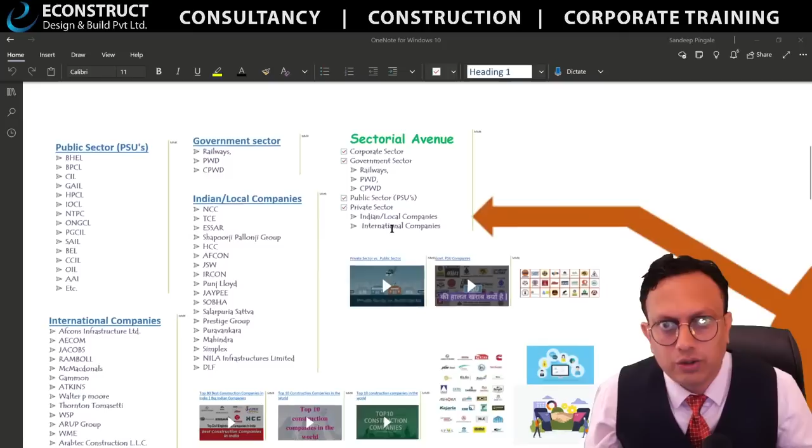Alright, so let's get started. First event that we have conducted was the avenues and all. So what are the different avenues? Sectorial avenues are there - public sector, PSU - you can see BHEL, ONGC, NTPC, all the public sector companies, government sectors are there.

Then you can see the local Indian companies. You can pause the videos and take screenshots so that you can think about what kind of opportunities are there. International companies are also there - Envisage, Afcons, AECOM, Jacobs, Ramboll - that was the company where I worked for a very long time, 5 to 6 years. So many international companies are recruiting civil structural engineers, project managers and all.

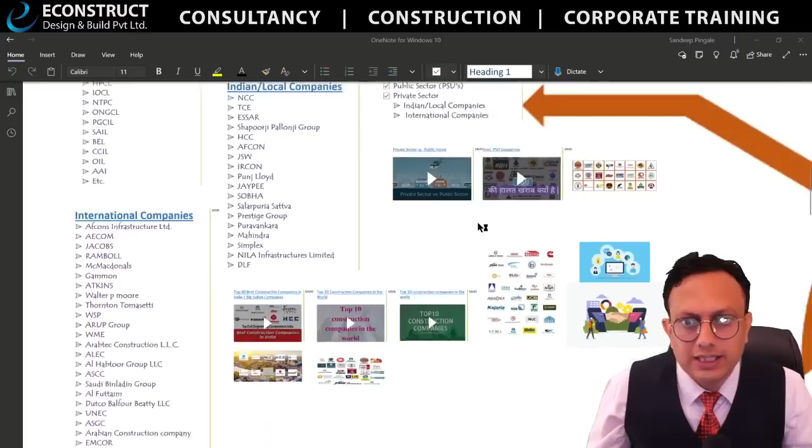So sectorial based avenues - corporate sector, government sector, private sector, public sector, local, international companies, and all are there. So if you see, many sectors are involved.

Let's say, for example, if you go to the building sector - residential, commercial, industrial, infrastructure, railway - all this comes under the public sector. Currently so many people will say, sir, railway, how can that be a public sector? You might be knowing there is a public IPO that has come, so obviously there is some kind of areas in the railways, and the second IPO is also coming, which is basically for finance.

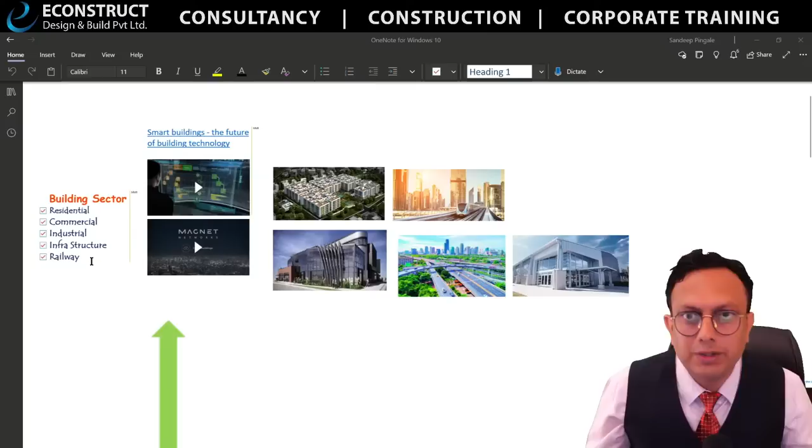So obviously it has become a public sector. So building sector also you are having, because in railways there are so many buildings, railway quarters and so many things. Obviously residential, commercial, all this will come under the building sector. Another one is subject to whatever the subject that you are liking.

Based on that, there are so many avenues which are related to geotechnical engineering. You can do geotechnical consultation, like giving the SBC, or maybe for tunneling it is required, for the earthen dam it is required. Many places geotechnical engineers are required.

Surveying is like, we are using the current surveys of the Britishers, to be very honest. We do not have the real-time survey maps. Even with the GPS and all, you know where you are standing on this entire planet, but you don't know where is your plot line. That is the irony of this country. So we definitely require a lot of awareness in surveying.

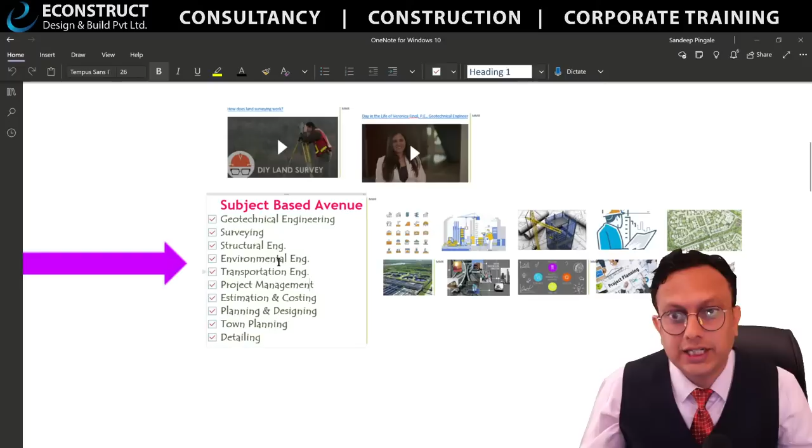When I was in Dubai, the GPS coordinate was there. I am dreaming, at least in my life, that if I'm purchasing a plot, there would be the 4 GPS coordinates, that this is the plot line, so somebody is not encroaching it, and somebody is not putting somebody else's name or reservations - many problems are there. So a lot of revolution, energy creation, innovation and digitalization is required in the surveying branch. The mapping, surveying, through GPS, with ArcGIS and many other softwares, I'm sure this particular branch can be revived over the period of time.

Structural engineering is also one of the branches where you can become a structural engineer, working with some other companies and all. Also environmental engineer, project transportation engineer - yes, there are pros and cons. Let's say, for example, you are a transportation engineer - you always need to be aligned with the contractor or with the government. You cannot just say that I want to have a road here.

It's a public property, so unless and until it's a private inside property road, you will not be able to get a chance in transportation engineering. But I'm not saying there is no scope.

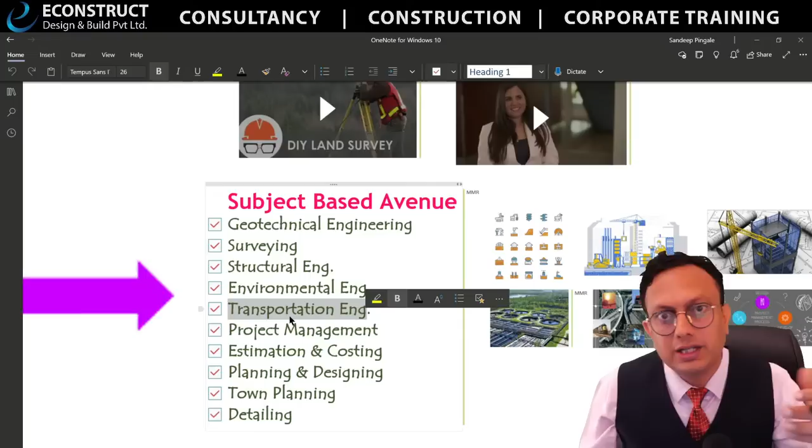The only thing is, you can do it with, let's say for example, project management in that particular area, BIM technology. In that you can take up certain government contracts and deal with project management, PERT chart, CPM chart, and actually economize cutting volume, cutting and filling quantities. So those kinds of things are there in transportation.

Project management is a little versatile branch. If you ask me, as a project manager, you can work with every single discipline in this particular area. Why? Because it's a very versatile and flexible kind of branch.

Project management is getting into everything. Even if you go to the IPL, for example, it's a project, so you need some kind of project management, how to make a launch. If there is a satellite, you need project management. If you are doing certain software development, there is project management. So project management is very vast.

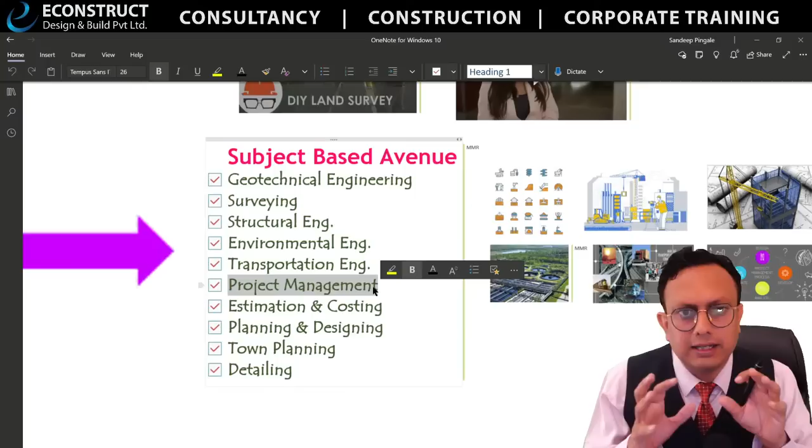It's not only the civil engineers' domain. There are so many domains. So we have seen so many estimation, costing, planning, designing and all. So we have seen so many avenues like this.

Okay, industry based avenues are there. Real estate industry, as I told you initially, it's not only buying and selling, you need to maintain the properties. So there is an audit, structural audit, and many other things. A lot of real estate companies are there where unfortunately civil engineers are not getting recruited.

And if you really want to, there is a lot of work we need to do. If you go to UK, for example, you will see buildings which are 350 years old, just like new. But in India, what is happening? Cement is cement, steel is steel, everything is the same, but still after 25-30 years, you'll see that, oh, this is an old building. What the heck is really happening?

It's a national resource loss that is happening. So we really need to revamp this industry and make sure that, because later on people just see what is your rate, how many rupees per square foot, that's the rate as a contractor you are quoting. So definitely there is a lot of revamping, the changes, transformation, not only change, transformation is required.

And believe me, crores of rupees. The first sector in India is the real estate sector, the construction sector. Somebody will say, as per statistics, agriculture is the first sector, but my father is a farmer, I still know that agriculture is a completely disorganized sector. The proper industrialization of agriculture has not happened, unfortunately.

So I wanted to tell you that proper industrialization of the construction industry has happened. Why has it not happened in the agriculture industry? There are so many problems related to the rain, related to the land, because it's food, so there is always sympathy involved. You might be knowing that currently in Delhi there are so many things happening, a lot of fighting is happening. So agriculture is not the first industry when it comes to industrialization.

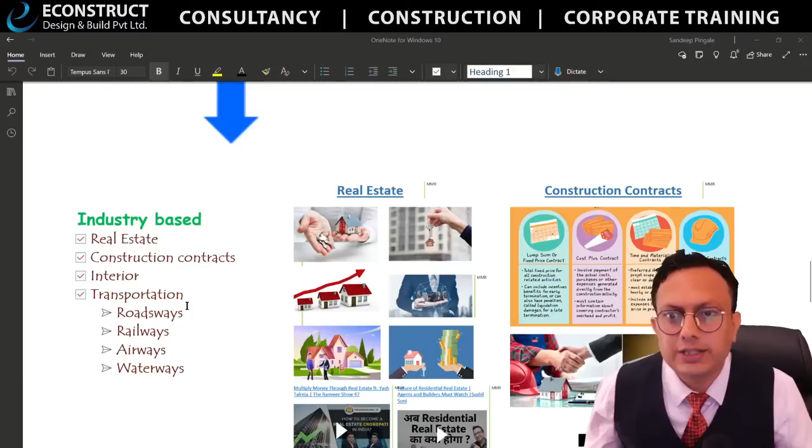The first industry in India when it comes to quantum of money is only the construction industry, the real estate industry, where all the money is flowing. So real estate industry, construction industry, interior, transportation, in all the ways, industry based avenues are there, skill based avenues are there.

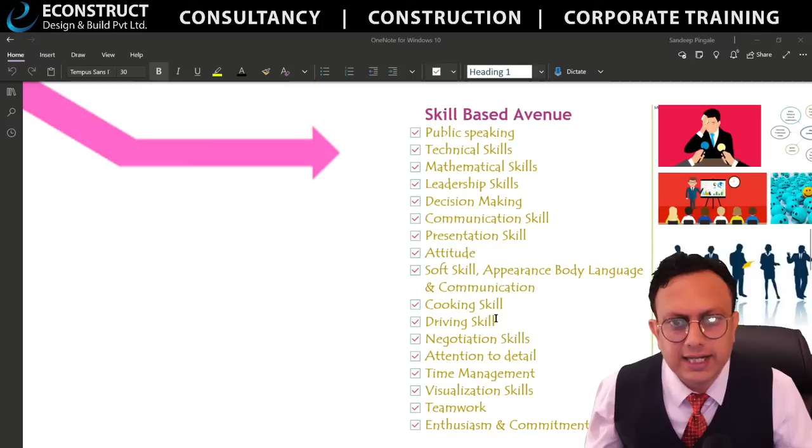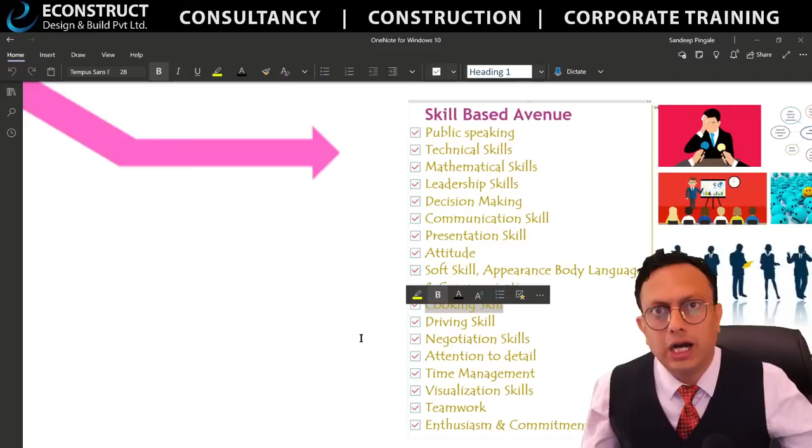Skill based avenues include public speaking, technical skills, mathematical skills, leadership. You can take a snapshot of this, even cooking skills. Let's say, for example, if you've got enrolled in a company called L&T, and there is a highway going on in the middle of the jungle, there is no cooking facility. So in that case, what do you do? So it's very important for us to understand that these kinds of skills would definitely help you out.

Okay, so it's a skill ultimately. So what kind of skills do you require? Because so many people say khana banana aata hai, can you do the driving - these kind of skills are definitely not the only skills through which your recruitment happens, but these skills will make you eligible to go to higher levels of roles and responsibilities.

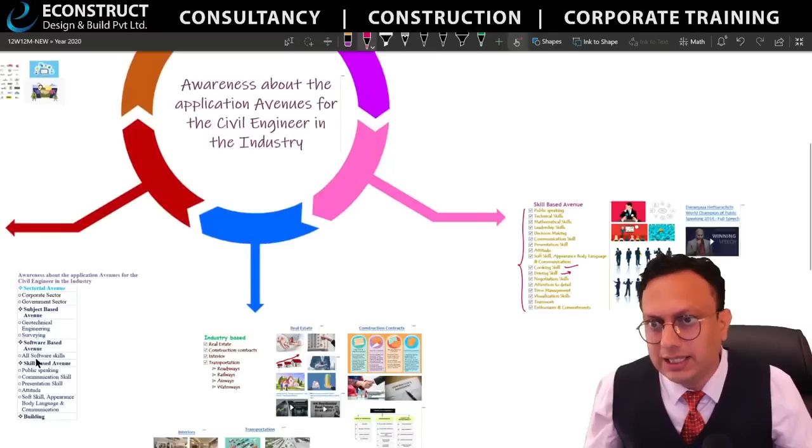So skill based avenues are also there. When you go to the industry based avenue, we have seen that sectorial based avenues are also there, where different sectors exist - software based avenues, subject based avenues. Software based means what kind of softwares are there.

Let's go to the software based avenue. So many people, let's say for example, I know the ETABS software, and I have somebody else who got the requirement in ETABS, so that's why the recruitment is happening. Somebody knows Tekla, somebody knows the Midas software, somebody knows the SAP 2000 software. So these kind of softwares - somebody knows Revit software.

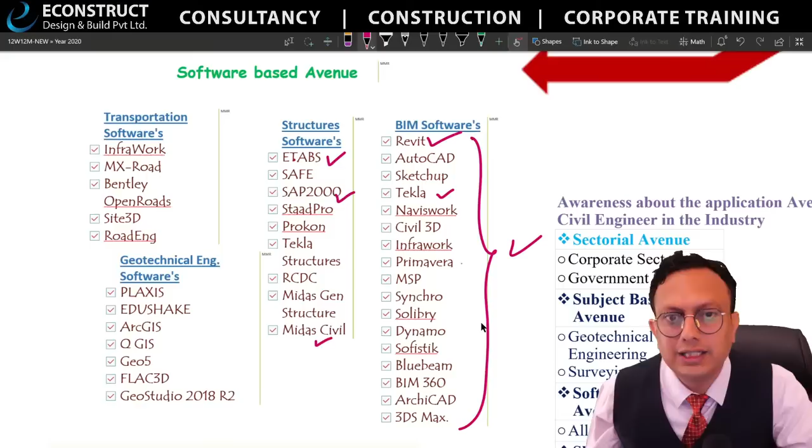So depending upon the requirement of the software, if you want to work on the BIM system, these are the softwares that you should know. I'm not saying all the softwares, but at least more than 50-60% of the softwares you must know. If you want to become a structural engineer, at least more than 50-60% softwares given in this particular list, you should be knowing.

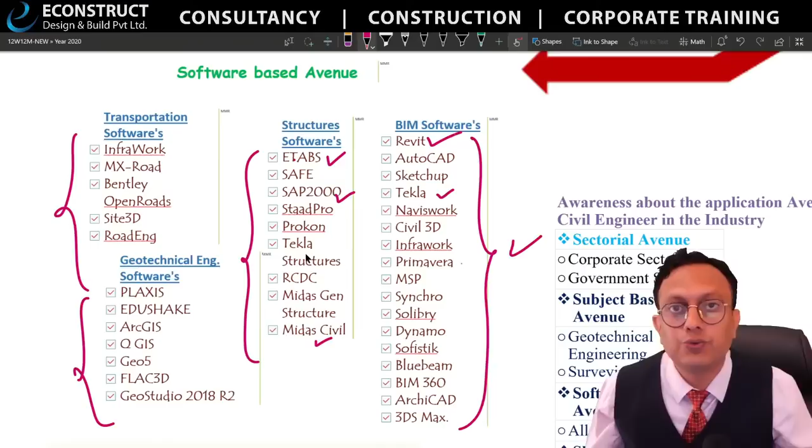If you want to go for infrastructure, or maybe geotechnical engineering, these particular software avenues will improve your career to the maximum extent. So these are the software based avenues in the current era of the 21st century, where the IT sector is there. In the IT sector, software is one of the key things that you should understand.

Why? Because you guys are not having the experience. Let's come to the reality - if you come out of college, how will you actually get the experience? So the only thing you will be having is expertise towards the software. So it will definitely help you.

Many people say that if you only learn softwares, will you get proper jobs in MNC companies and all? It will never happen. Why? Because along with the softwares, you require very, very fundamental things. What are the fundamental things?

First thing is actually software. Along with the software, you require code-based knowledge. The third thing which you require is engineering principles - structural engineering principles, project management principles, surveying, and other engineering principles you require. And the fourth thing is actually live projects.

Okay, expertise. So these four things are required. Only software if you know, only gearbox if you know, actually you cannot drive a car.

Let's come to the reality. Civil engineering is the industry where you need to understand that this is experiential knowledge. So software based requirement, code based requirement, engineering based requirement, and live project expertise requirement are all there.

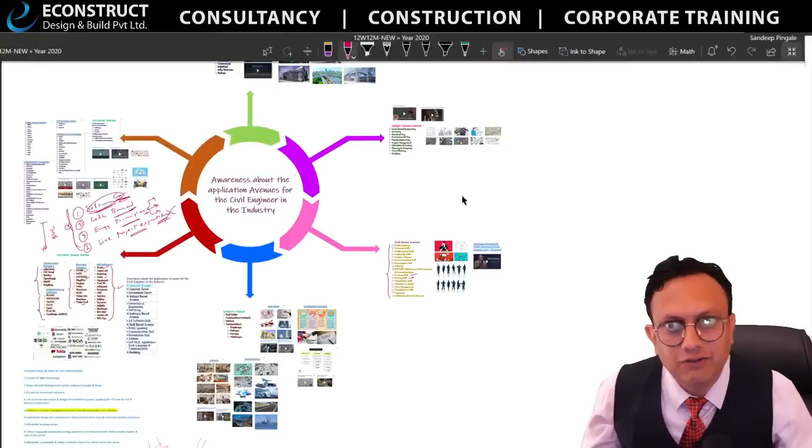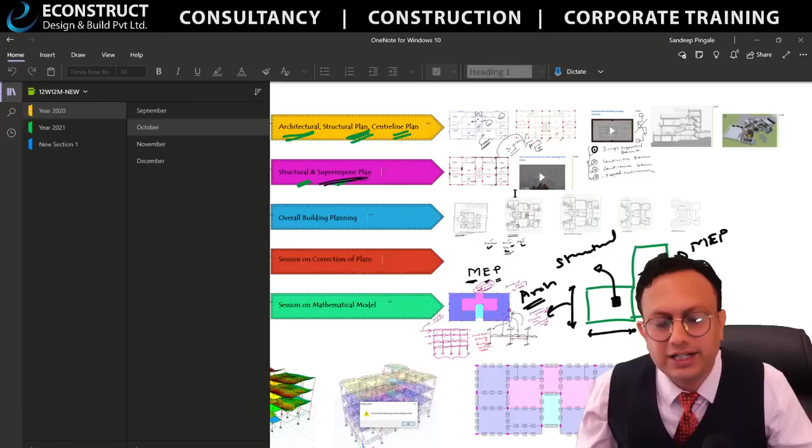This is what we explained in the very first session, but if you want to look into it in detail, I have explained it because a lot of sessions I have taken. In September we started, then in October we studied the centerline plan, superimposed plan, and other things. You will see those details in those videos. If you are not getting the videos, please ask on the WhatsApp number given on our website or in the description box below, and you'll get the links.

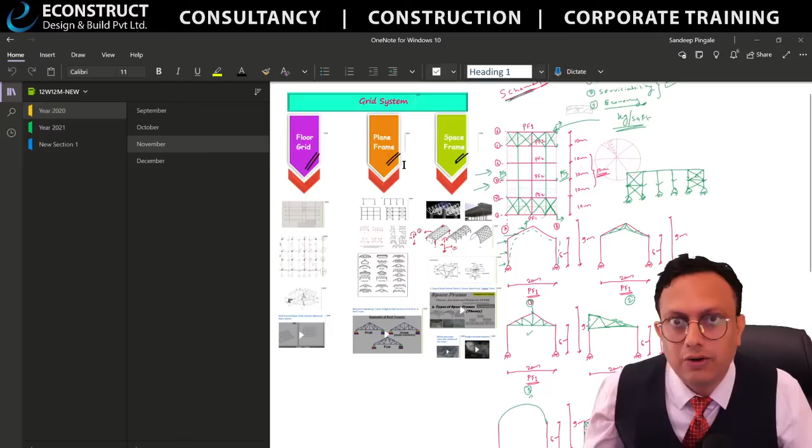In the November month, we have seen many things related to the grid system, like portal frame analysis, space frame analysis, and all those things we studied during grid systems. In December, during the last month, we saw different types of analysis, static analysis, dynamic analysis, the uses and requirements. If you have not gone through these videos, please subscribe to our channel and you can go to those videos, or ask the WhatsApp number given below. We'll be giving access, because certain videos we are not airing continuously, due to certain reasons, since this is basically a 12W 12M session.

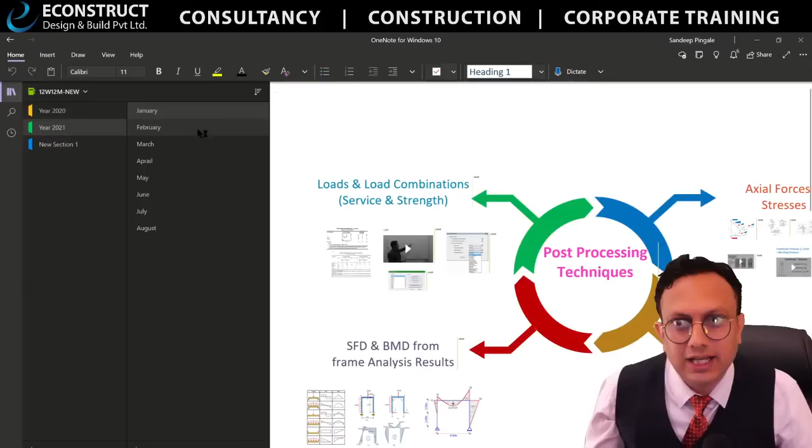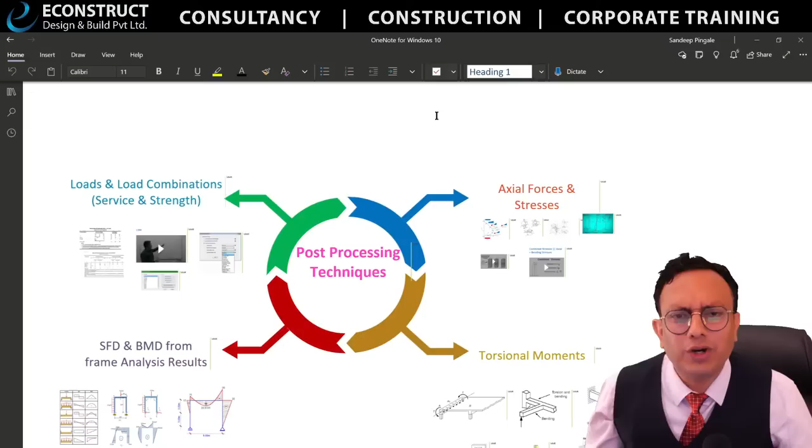In this year, January, February, all these sessions would be there, so stay tuned, you will get a lot of information. Let's talk about post-processing techniques, what this is, and what all the different techniques are there. After you do the analysis, say static or dynamic analysis, what is basically the post-processing technique? Let's look into that. For example, say you got certain problems with your body, you got some headache or maybe fever or something like that. So what do you do? You go to the hospital or maybe a clinic or a doctor.

The doctor will take your pulse, check the BP, check the body temperature, and all. He will try to identify the symptoms. The body is giving certain signals, right? So that is one type of analysis, believe me.

Another type of analysis - if something seems off, like 'oh my god, this might be corona, this might be something else,' he will do a blood test. Further analysis - blood test, hemoglobin, thyroid profile and all. So a variety of different analyses he will conduct, so that he will have a lot of data in front of him to make a proper diagnosis of what's really happening and why the body is behaving like this. Understood?

So this is basically medical analysis. When it comes to civil engineering or structural engineering analysis, the same types of analysis are there, like static analysis, dynamic analysis, many different types. Furthermore, if there are deflection issues, you will go to creep analysis, long-term performance analysis. So many different types of analysis we have seen during the last session.

Imagine that some of you might not know what creep analysis is. Imagine you are a doctor and you don't know hemoglobin - 'Oops, what is this? Hemoglobin? Wait, let me Google it. How to check the hemoglobin?' If that kind of doctor you are going to, what will be the situation? You will change the doctor - he doesn't know hemoglobin also, the levels of that.

Understood? Similarly, what is creep analysis - you don't know, you need to understand that. In college, actually, only one type of analysis gets conducted - that is linear static analysis. And then all other parameters would be there, like deflections, bending moment, shear force and all.

Actually, I'm not giving any kind of justice to that, because within just 4 years it is very tightly packed as a civil engineering course. It's not that they can just focus only on the structural branch - they need to work on other branches also, they need to complete their syllabus also. So they cannot combine all the different types.

So what happens is the person who wanted to do structural engineering or something like that loses focus - that's what is happening. Understood? So what actually has to be changed in the syllabus is a separate question. We cannot change the universities, college people, or the syllabus - it's impossible, let's face the reality. So you need to focus on certain other parameters than the colleges, so that you can get practical touch. That's what we have started.

So let's see the post-processing techniques and how to do the analysis. If you go here, you will see there are different types of analysis - dead load, live load, and different cases. You can add different cases too: linear static, non-linear static, non-linear construction stage analysis, response spectrum analysis, time history analysis, buckling analysis, hyperstatic analysis. So many different types of analysis are there. It's not like just knowing this - in one project you might require more than 60-70% of the analysis types.

There's a lot to construction stage analysis - it's a very big topic. If you see construction stage analysis, you can add different stages. You will have tree diagrams showing different outputs, and you can expand the stages if you want. For example, let me show you one area - the auto sequence stages. If I add this, I'll go to P-delta and auto sequential stage construction sequence analysis. Here you can see a variety of construction stages - what are the different stages, and you can expand them to see what's happening in each particular stage.

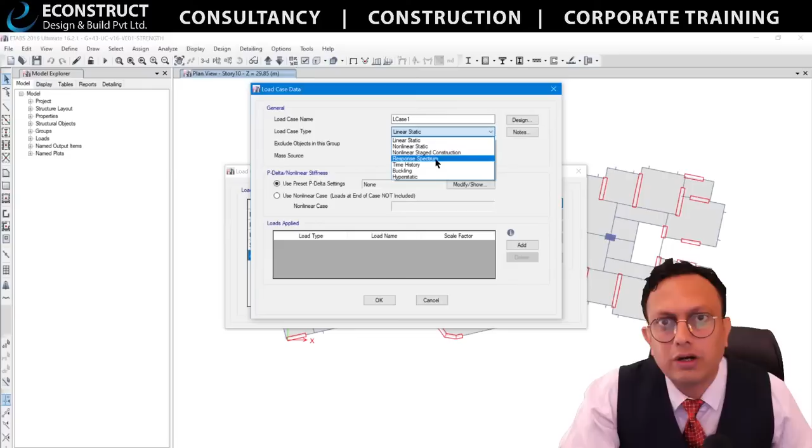Similarly in structural engineering, depending upon the type of project, you need to give the particular analysis. A good doctor, based on the patient, will diagnose first what exactly has happened, understand whether this is the cause, and then apply that kind of medicine or injection. Similarly in structural engineering, depending upon the requirement - whether it's related to static analysis, dynamic analysis and so on - he will apply that kind of analysis, perform it, get the results, and do the scrutiny.

So after the analysis, what are all the different things to check? Let's see that. After the analysis gets over, you would definitely require to check many things. First of all, what are the loads and load combinations? Let's see what loads and load combinations are there when it comes to the Indian code. Other international codes have other things. We'll see the Indian codes first, and then we'll see the other international codes a little bit too.

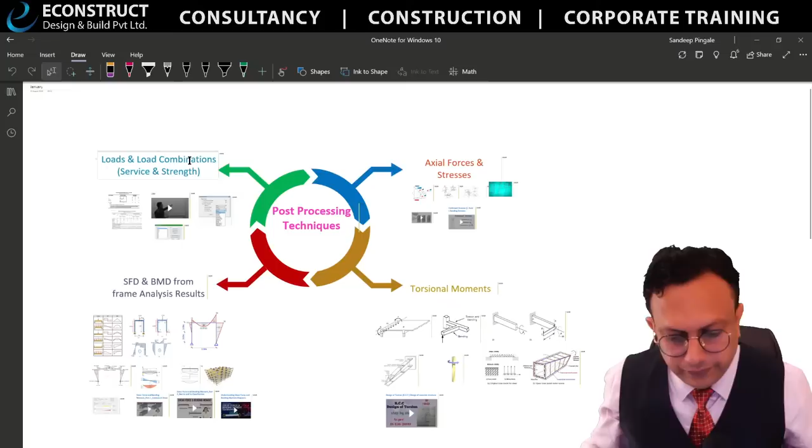So let's talk about load combinations. These are very important. The first fundamental combination is 1.5 times dead load plus 1.5 times live load. We call it DL plus LL.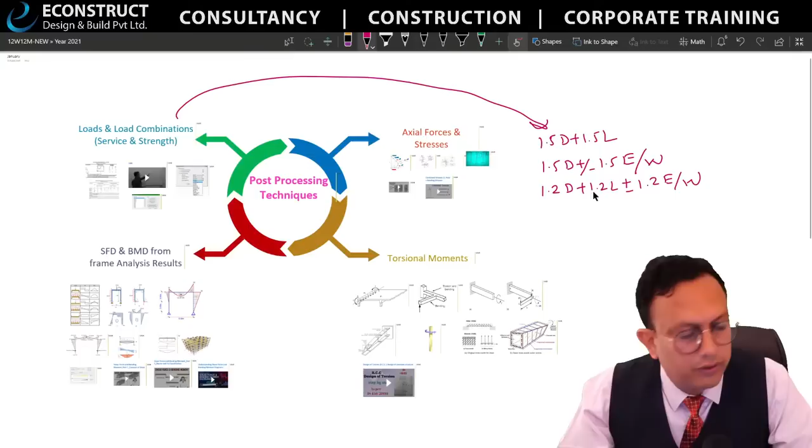The second combination is 1.5 times dead load plus or minus 1.5 times earthquake load or wind load. Then 1.2 times dead load plus 1.2 times live load plus or minus 1.2 times earthquake load or wind load. Another set is 0.9 times dead load plus or minus 1.5 times earthquake load or wind load.

Generally these are the combinations, but these aren't the only ones. For earthquake load, you will have earthquake in X, earthquake in Y. Sometimes if there are cantilevers, there will be earthquake in Z also. This would be static analysis. Sometimes earthquake will be in dynamic form, so spectral X and spectral Y.

For wind load, you have wind X and wind Y, which is the static analysis. Sometimes you will have wind gust calculations, so WDX which is wind dynamic X. Sometimes there is wind tunnel analysis, wind tunnel X and wind tunnel Y, applied plus and minus. There are a lot of things combined.

Which combination will you use? You might think, this is a big one, so let's use this. No, you need to use the worst load combination.

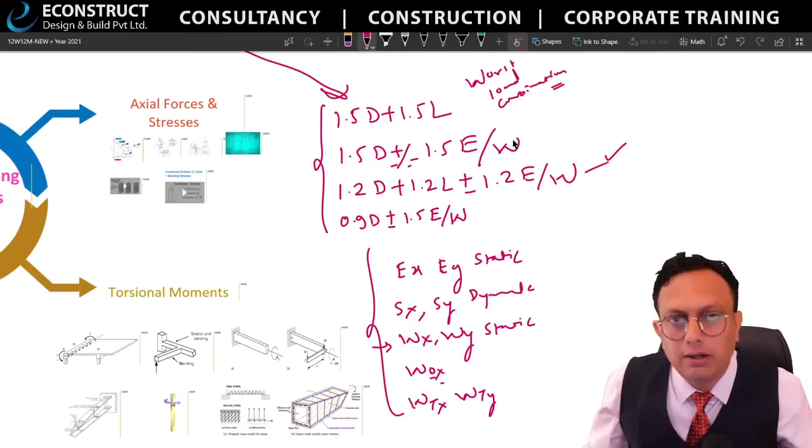So many technical things you should understand, and how to apply them you need to go through. So let's see, in a particular project, how you are going to do the analysis.

I'll take a simple project instead of a complicated one. This is a 43-story building, I'll show you after running the analysis. Let's go to a simple project, select the Indian code, IS code, and choose a flat slab with perimeter beam. So you'll have beams and slabs also. I'll give certain loads here.

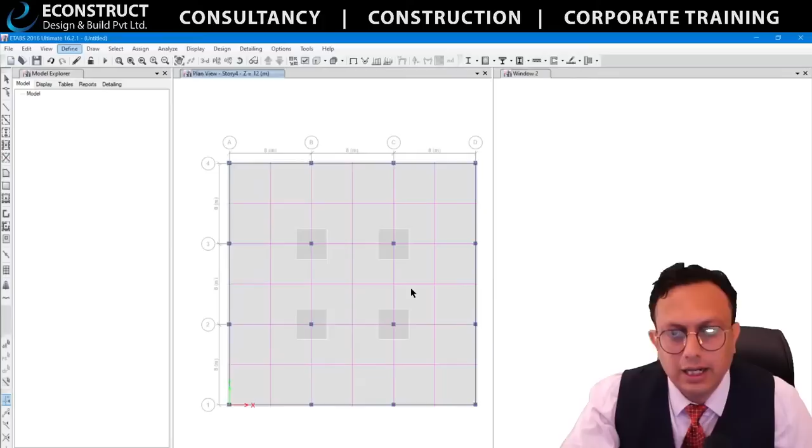You will run the analysis for this, but for that I will add the earthquake loads also. Once you do that, it will generate the model. Now I will apply certain earthquake loads also.

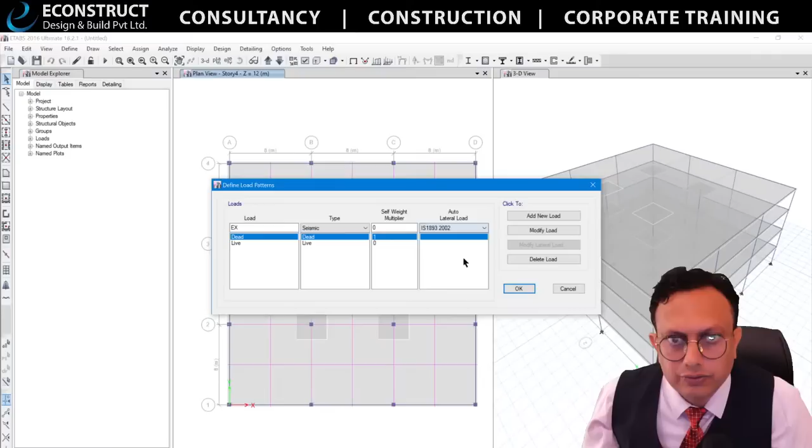Let's go to the load cases, for example earthquake in X direction. I'll give that in the X direction. I'll keep this same for now, but you need to apply it properly based on code requirements. I'll apply it in the Y direction also.

Then I'll apply the wind load, wind X. This goes to the wind load section, addition of wind load here, and wind in Y direction also I'll be adding.

From here you will see, for example, 0 degrees wind X, and here 90 degrees. Why? Because based on the degrees, the angle of application of the load will change. So Wx will be in the X direction, you can see the X here. Based on that it will be considered in the X direction, and you can see the Y direction here, applied to the Y direction.

I'll show you that in the arrow. The X direction, whenever applied, will act on the building in this direction because this is X, and it will be applied in the Y direction because this one is Y. So earthquake load and wind loads are given here, in static format. Now we'll see the dynamic format also.

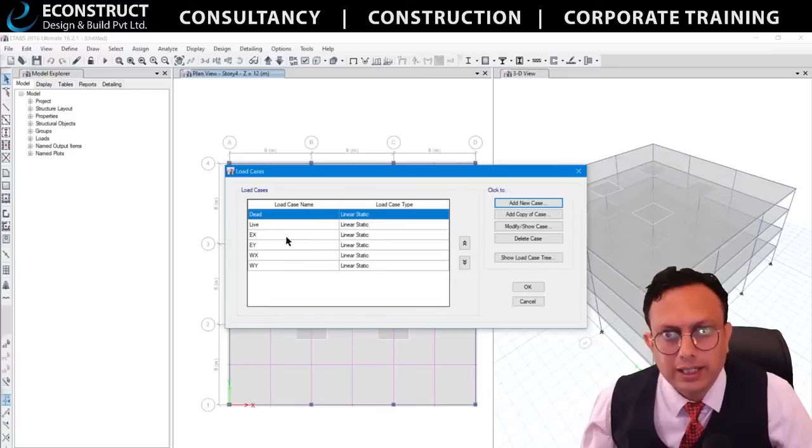Okay, so what else we can do? We can go here and add certain dynamic load cases if you want. From here, this is static, so similarly you can go to the dynamic analysis, let's say for example response spectrum and all. So that cases also you can add, but currently we will consider only these particular static forces.

So let's get started. I'll just run the analysis with a certain file name. I'll just give any particular file name and I'll start.

Before that, I'll just show you the live project also. This is the construction sequence analysis that's going on for the live project. This is a 43-story building in which you will study the sequence analysis also, but here you will take it as a prototype, the smaller version, so that you will understand the concepts basically.

All right, so the analysis is happening. This is the flat slab. You can see that it's a very regular grid, easy to understand and all.

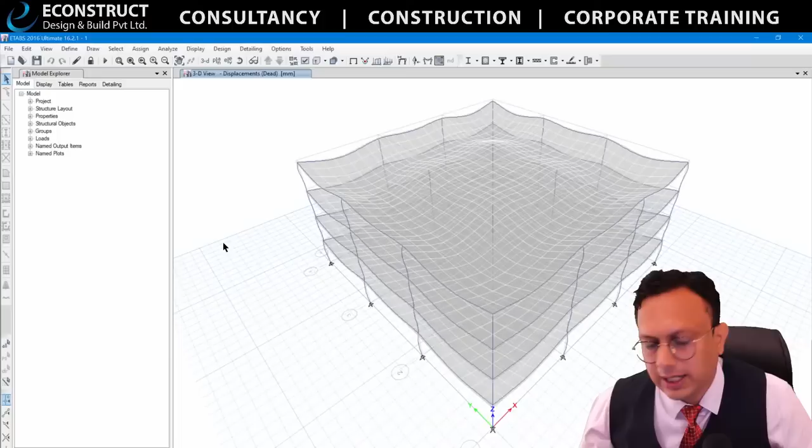The first thing that you will study is the deflection shape. At a particular glance, you can easily see that the X, Y, Z displacements are happening. It means whenever you will see the picture, you will see X, Y, Z, Rx, Ry, Rz. So all the figures will be there over there.

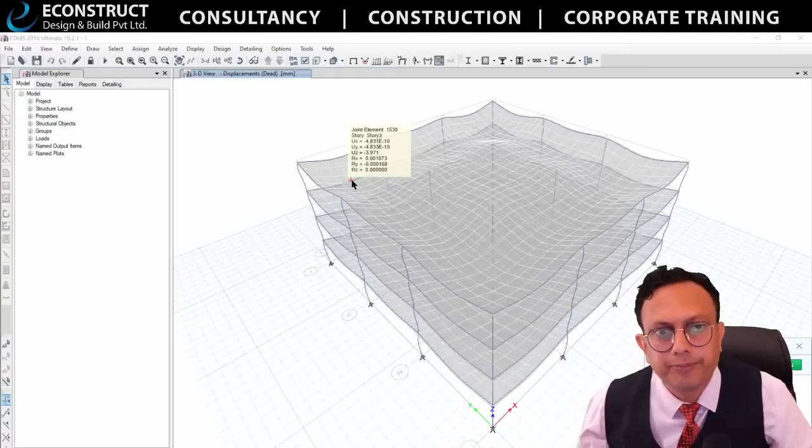You can see Ux, Uy, Uz, Rx, Ry, Rz. So all these things are happening, why? Because you will get the translation and you will get the rotation also. So this is how actually the deflection shape is there.

So let's say, for example, if you want to see the contours in color form, you will see that in the color forms also. You can see that at the bottom side you will see what is the minimum deflection, what is the maximum deflection. The blue color or the green color is the lesser deflection, and if you see the red color or pink color, it is the maximum deflection. So you can see where exactly you need to focus basically.

So it's the first thing that you will see when it comes to the analysis, the deflection shape. The dead load deflection shape is very important - how much amount of deflection is coming. So whenever you run the analysis, please make sure that the dead load deflection is proper, the shape is proper.

And if you want to see the animation, you can just start here the animation and you will see the deflection shape also, how the animation is happening, so you will see the behavior of the structure with its own self-weight. This is the type of animation that the software will show you, how basically the building will be behaving with its own dead load.

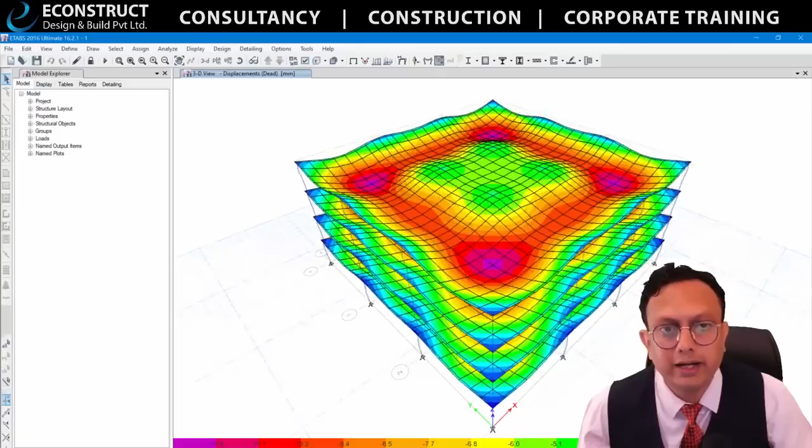So similarly, if you want to see the same type of animation for earthquake in X direction, you can see that the animation is happening. The forces are going, the deflection is happening in X direction, right? Because this is, let's say for instance, the earthquake in X direction that is there. See here, earthquake in X direction.

Okay, now similarly, if you want to see the earthquake in the Y direction, let's say for example, I'll just show you in the Y direction. This is under the Y direction, so this also needs to be there under Y. Okay, so this is the deflection shape, and similarly, like that kind of shapes would be there.

It depends on what exactly you are going to get the deflections and all - also the behavior study also will be there for you. Okay, I think there is some buffering problem, I'll just close this, I'm sorry.

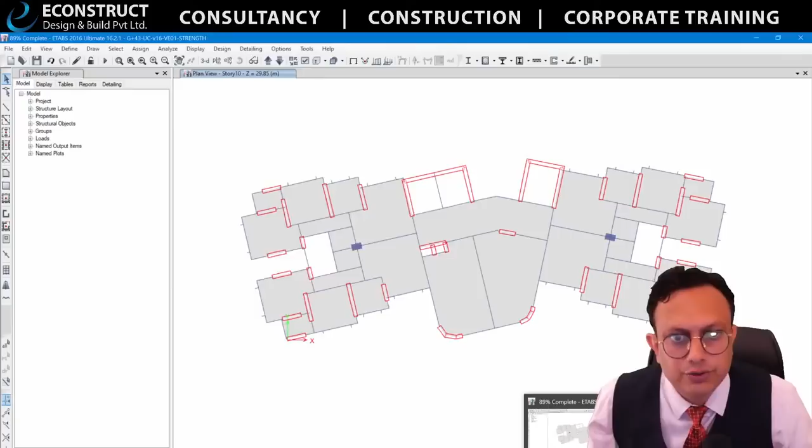All right, so let's say, for example, there is a live project now, I'll just show you the live project also. Now this is the analysis that's going on, you can see that the analysis is happening. It will take a little bit more time probably, because the sequence analysis of the 43-story building takes a little longer time.

All right, so along with the deflection shape, what all other things can you study? Let's say, for example, you want to see the bending moment diagram. So this is the bending moment diagram, of a column and as a beam. You can see that this is the column bending moment diagram.

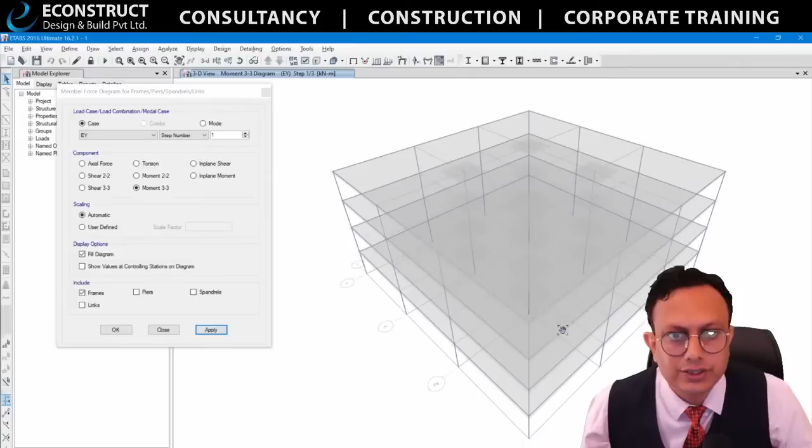In the dead load, I want to see the earthquake load, for example. You can see that in the earthquake load, this is the bending moment diagram, specifically in the y direction. Understood? Why? Because the y direction is in this direction, so you are applying the force in this direction. Obviously, the bending moment here will be less, but the bending moment at these particular frames will be more.

So this is how the post-processing analysis is actually what you will study. Imagine that you want to study the shear force diagram. This is the shear force under the y direction. So you want to see that in the dead load, live load, this is the shear force diagram. Understood? So this is how actually you will study this.

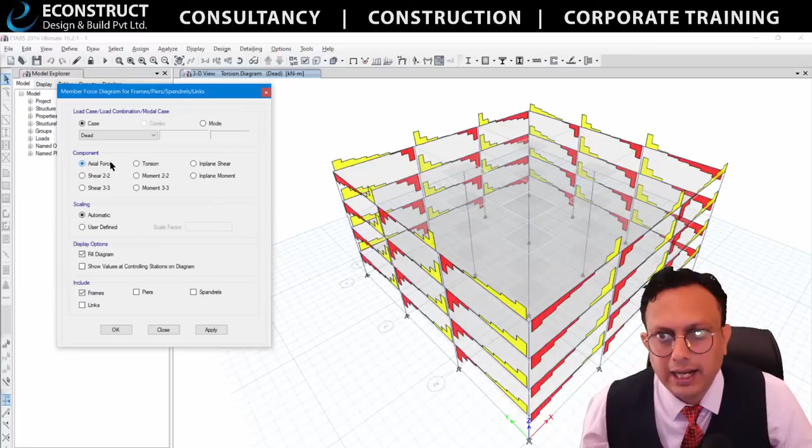So there are so many torsion diagrams also there. Now these are, I want to see the axial forces in the columns, the gravity forces, like this you can see. No, I'm not happy with this. I want to see the values also.

No, I want to see the values marked everywhere, so I need not search. So you can click this button, given here, this one, so that you can click the values. You can just say apply here, and you will see the values.

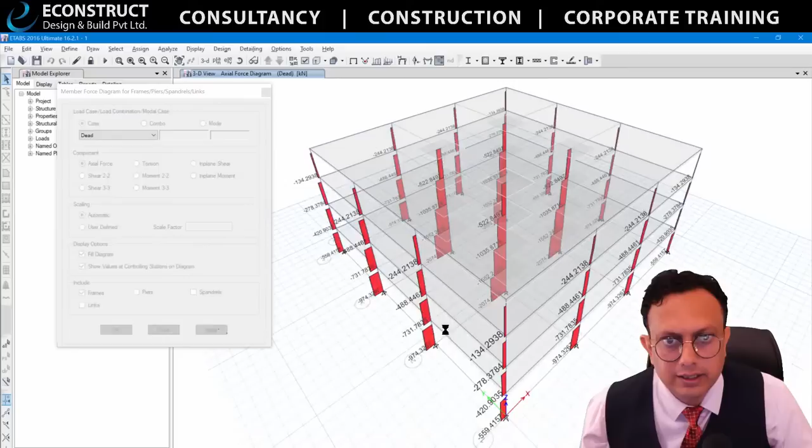Okay, so let's say 134.2938 - now this is crazy, I don't want this number to be like that. So you can go to one place where you can define that. I wanted to give the decimal point a little bit less, let's say 1, and just say okay. And then you apply this.

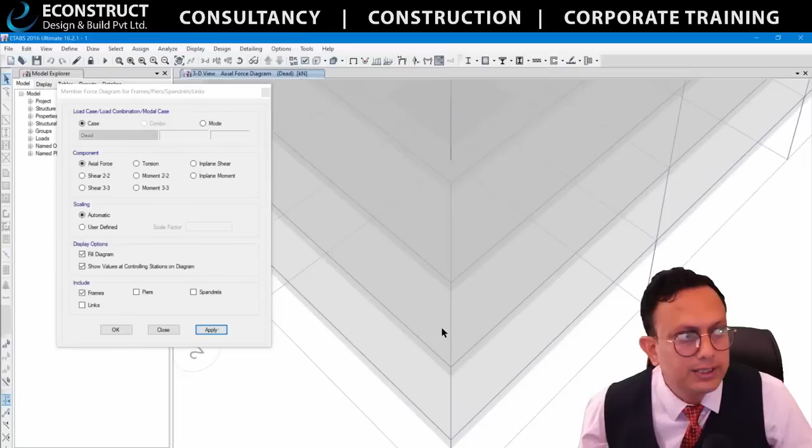Decimal unit, relative distance - the forces you need to give because it's a force. So I'll just apply, sorry. So you can see that here it's 134.3 actually, because we gave the decimal point as 1. Understood? So it's, now this is a little clumsy, I'm not able to see anything.

So let's say from here I'll hide the shear walls and floors and all actually. And you can take up the photograph of this and print it. Understood? I'm not getting actually a certain thing.

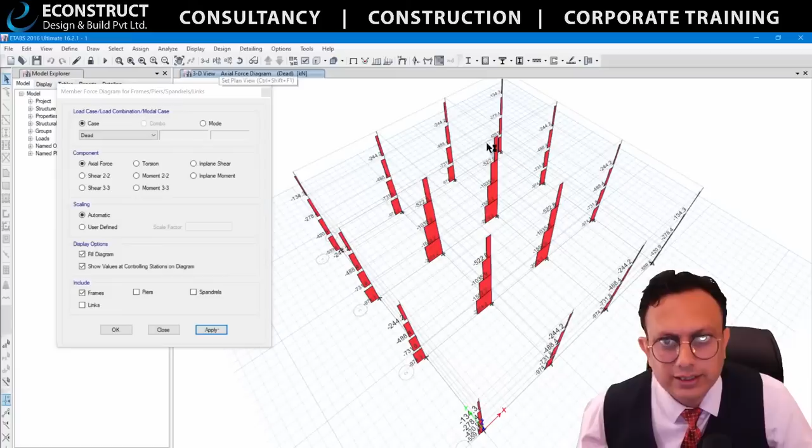Let's say for example I want to go to the base and design the foundations. Okay, go to the foundation base. Now this is the base. Now you want to study that, you need to give the forces here. So let's say for example these are the arrows. Okay, so you will get the forces out here. You can scroll your mouse and you will get it, the force value also you will get it here.

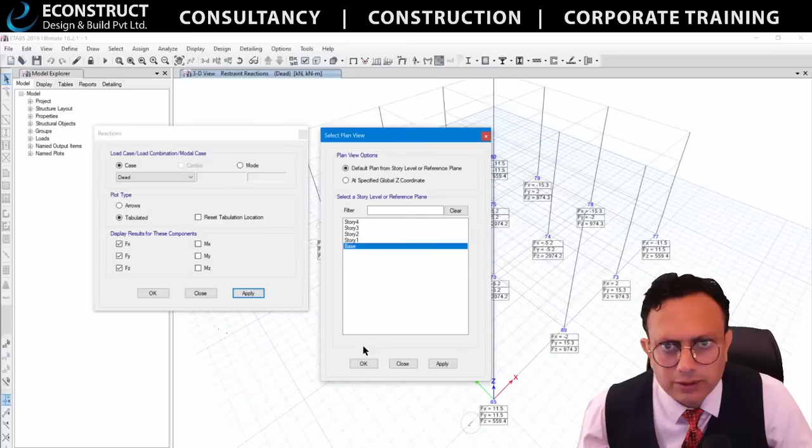But still, no, actually I'm not able to see that properly. Fine, so what you do is go here in the same option and go to the tabulated form. Now is it okay? No, still I'm not able to take the printout. You go to the plan, for example, go to the base. Wow, this is what I need. Right? So you'll get the fx, fy and you will get the fz.

What about other loads? Okay, no problem. You go to the live load, you will take this. You go to the earthquake load, you will take this.

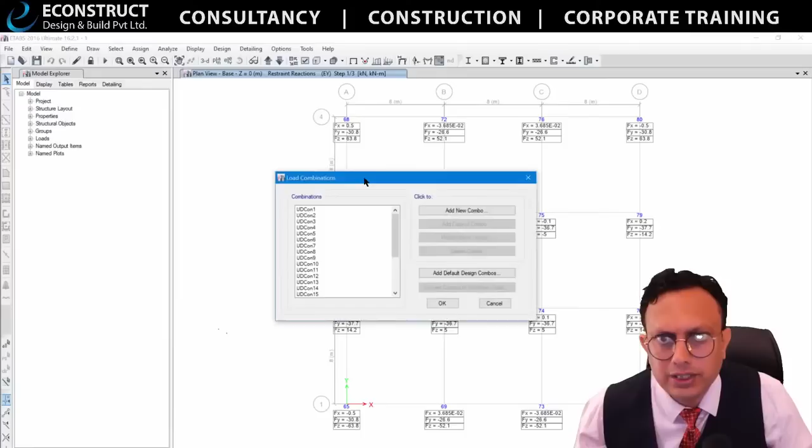Understood? No, but I want to have the worst load combination. Don't worry, there is an option. You go to the load combinations, you add the default load combinations as per the, let's say, concrete frame design. Okay, and you will add a combination. Go to add new, and in which you will add the combination. Inside the combination also it is possible. So let's say you'll add combination 1, you'll add combination 2, you will add combination 3, like that.

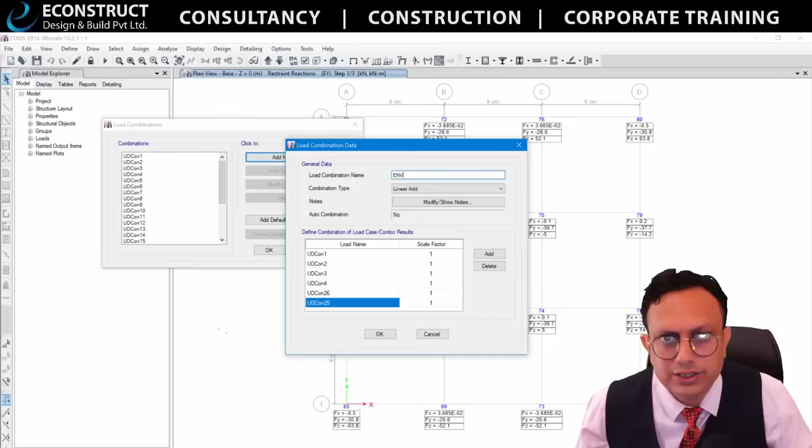Actually, ideally you should be adding all the combinations. I'll add only a few of them because of the time constraint. Okay, 26, 25 - look, let's say only I'll add the combination. This is your envelope combination. I'll give the envelope here, and make sure that you will be changing this to the envelope. All right, so from here I'll be selecting combination as an envelope.

What about the bending moments? Don't worry, you click the bending moments, you will get everything that is needed. Now the bending moment, it is not coming. Yes, why? Because if you go here, it is a hinge support.

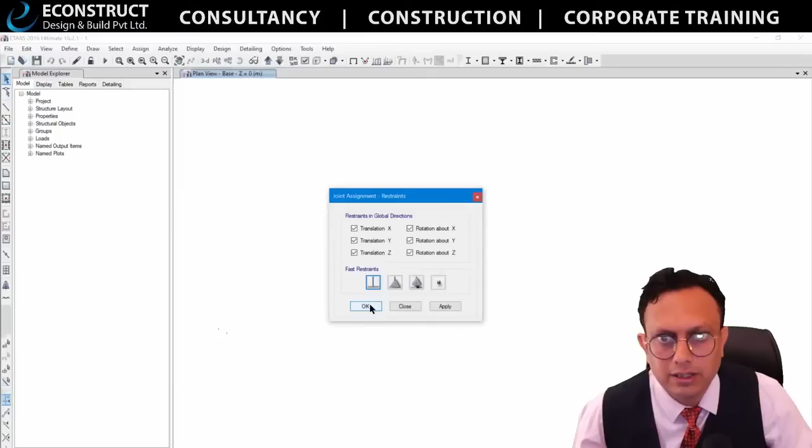But I want that. Okay, unlock the model, go to the base, give the support as a fixed support. Run the analysis. Okay, so after running the analysis, you will get - as you know, a hinge support will have only 3 degrees of freedom.

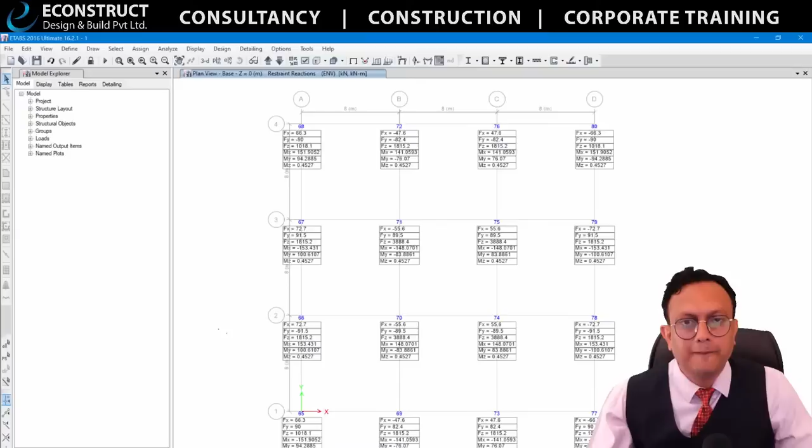Fixed supports have 0 degrees of freedom, so you'll get all the results. You'll go here, and now you'll see all the 6 results. This is how the post-processing techniques would help you genuinely, seriously.

Once you are done, let's say I want to see certain graphs or certain things. Don't worry, you go here. Let's say I want to see one particular grid. No problem, you go to the elevation, you will see the grid. I want to see the bending moment along the grid. No problem, I'll show the bending moment along the grid.

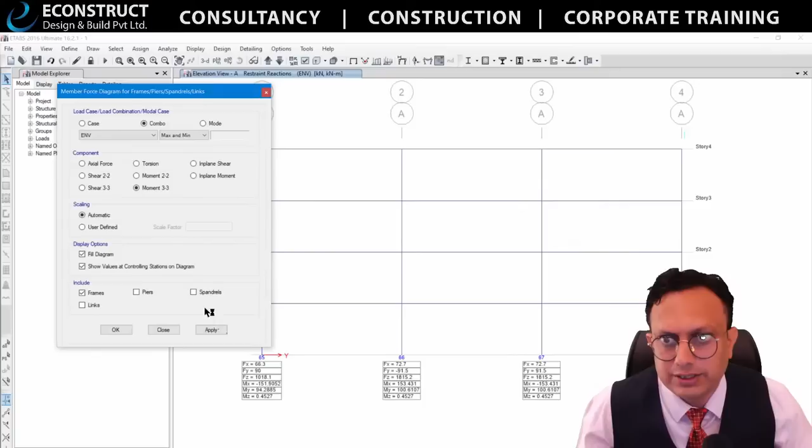That too, the worst combination. I want to see the dead load. Okay, you'll see dead load. I want to see worst load. You go to the envelope and see the worst load combination. For this, you can pick up the value, put that in the spreadsheet and design it. Matter is over, understood? The torsion value, shear force value, axial force value in the columns.

I want to see all the columns in one line, for example. So you go to, let's say, any particular floor. You go to developed elevation. So I'll just say, from here to here to here to here.

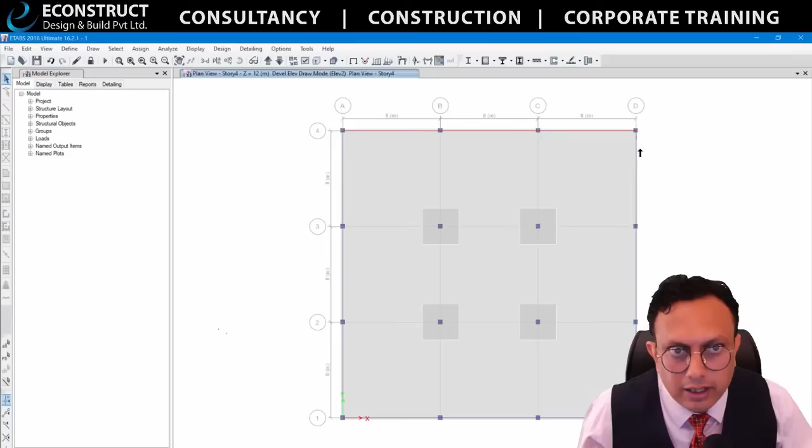I think I've done a mistake, yeah, because I have not clicked that point properly. I'll click it one more time. I'll go to developed elevation from here to here to here to here, and I'll right click it. Boom, all the columns in front of you.

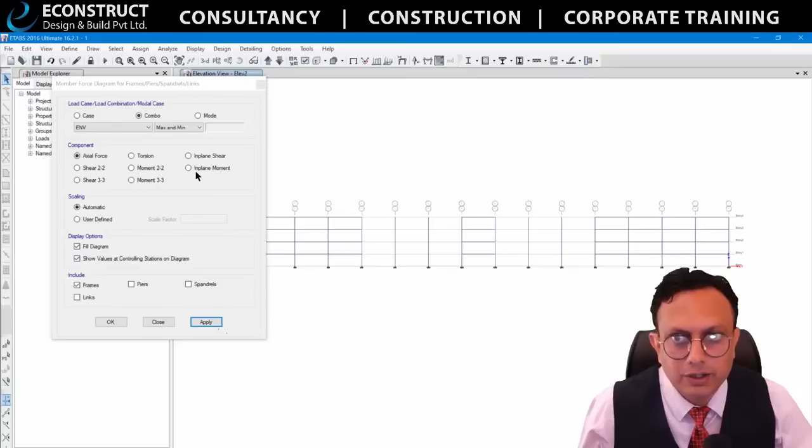I want to see the bending moment, axial forces of all the columns. The only thing is, since this particular thing has not been done before, the bending moment is not shown, but you can see all the columns. Let's say I'll go to select object type of all the columns, only the columns will be selected. Then you can go to this option and see the bending moment or the axial forces of all the columns.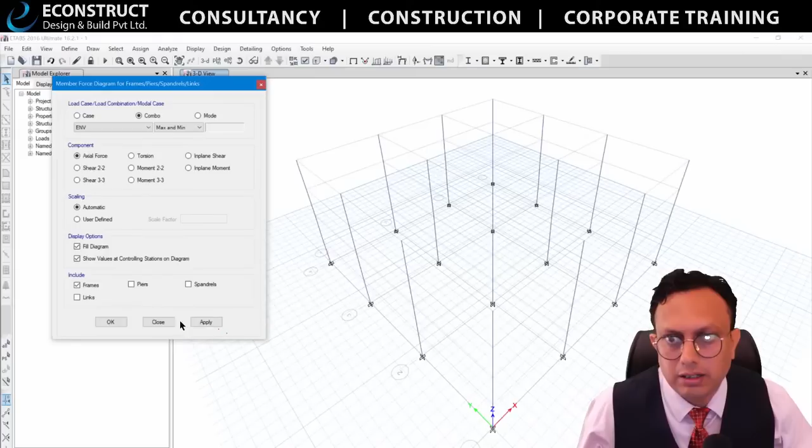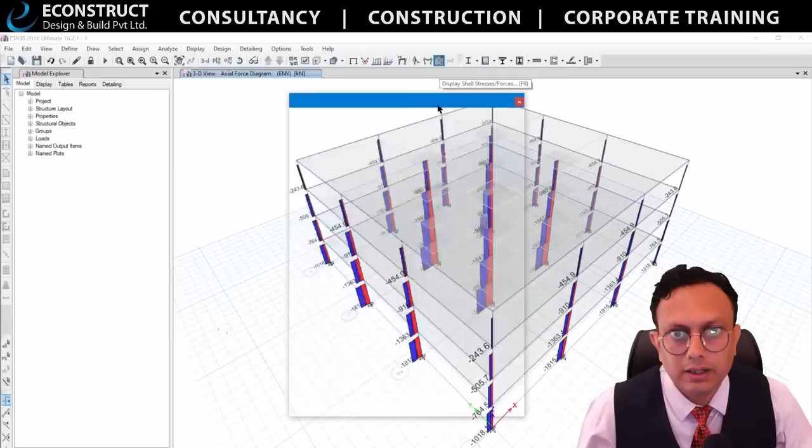What about the bending moment in the slab? Let's see that also. Let's go here, and I'll show you the bending moment of the slab. So you go here, the bending moment about the slab, envelope bending moment about the slab.

This is undeformed shape. I want to see the deformed shape. Don't worry, I'll get the deformed shape also, any extrusion shape or something like that to see it in proper way. Extrusion shape.

Understood? So a variety of options are available. Let's say I have given the bending moment. I want to design that as a PT, post-tensioning, and see the effect of what bending moment is coming here. So you can go to the section cut, and here you will get the results.

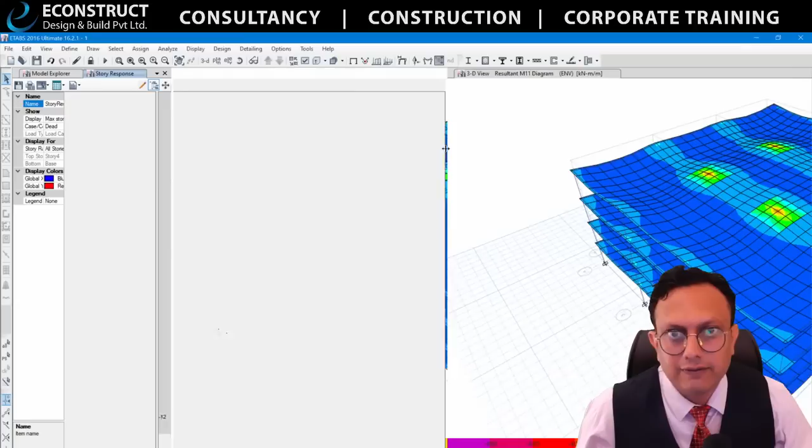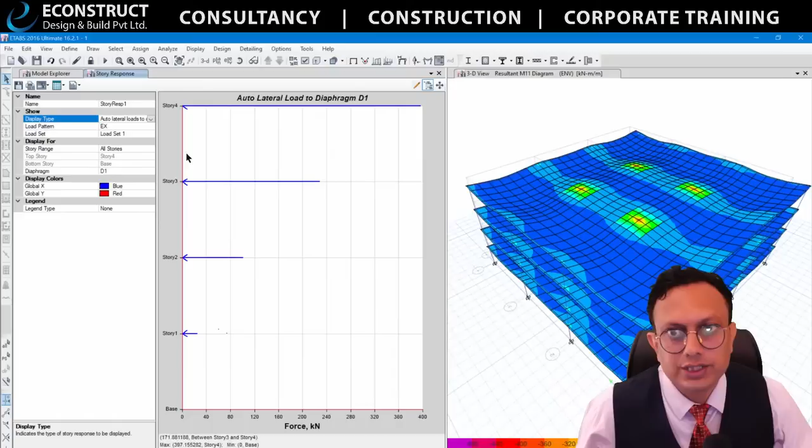I want to see some reports or something like that. You go to this, there is a graph. Let's say you want to see the drift, the maximum story displacement, the base shear. So let's say EX, what is the base shear? Instead of the base shear, you want to see the deflections, what are the lateral forces acting on it. You will see that here.

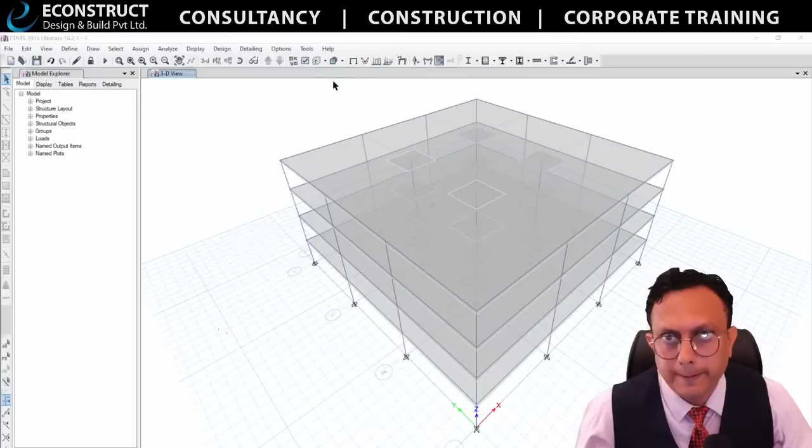Can I see that in the 3D view? Yes, you can see that also in the 3D view. I'll go here. You can go to this option and give the earthquake loads in the X direction, or in the Y direction. So this is the force coming on this, and in the Y direction you will see the force coming on this. So this is the force acting on the surface in the diaphragm center.

So what is this diaphragm? This is the diaphragm, my dear. This is like a controlling point, actually, the center of mass and center of stiffness. That's the point where the entire mass or stiffness is concentrated.

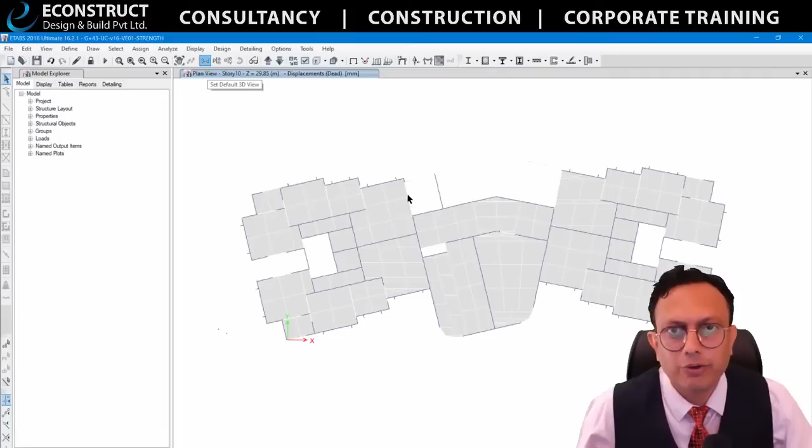Understood? So all the techniques are there. Many techniques are there, and this is not only one technique. If you go to the actual live project, you will see that you can go to the 3D view. Now this is in plan, but you can go to the 3D view and see the deflections and other things. It takes a little bit more time, that's why I use the simple project actually, it's easy for doing the maneuvering and all. So you'll see all the figures which I've shown you first.

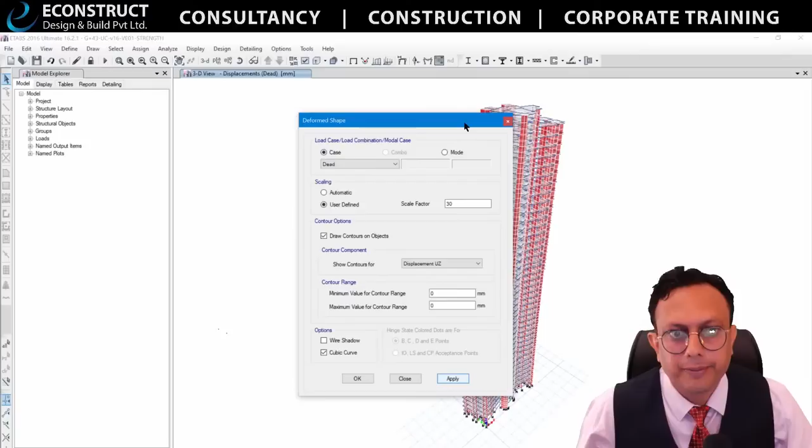Similarly, you go to this place and go to, let's say for example, the deflections in UZ. If that is the situation, it will show you the deflection diagram in contour format in the Z direction, shear force bending moment diagram. The same thing will be applied to this particular live project also. See this, you'll see the animations and many other things. So you can use the prototype technique, learn it from here, and use it in the live project. So generally this is what we train, and we help people understand how it works.

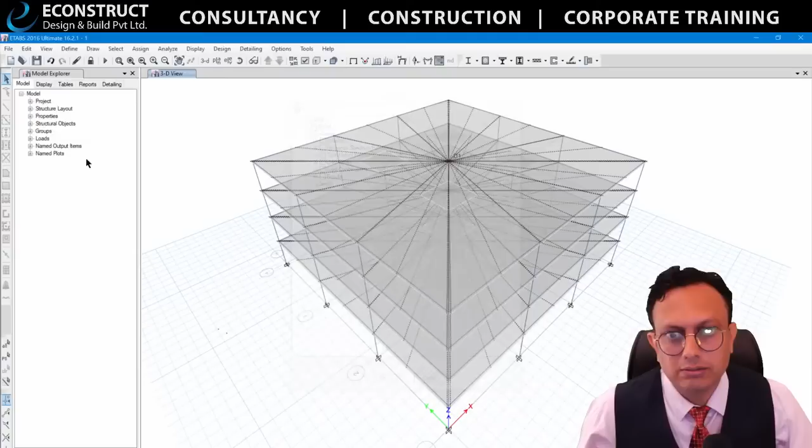So we have seen many graphs, techniques and all actually, so I hope you've learned quite a lot from this. These are not only techniques and tools, these are actually the professional way of showing reports. So let's say if somebody wants to see the report, you can go to show tables and see the reports. I'll go to the deflections, and you'll get the tabulated format, which you can just click and export to Excel also. So let's say I'll export it to Excel. The Excel will pop up and it will be exported directly to the Excel.

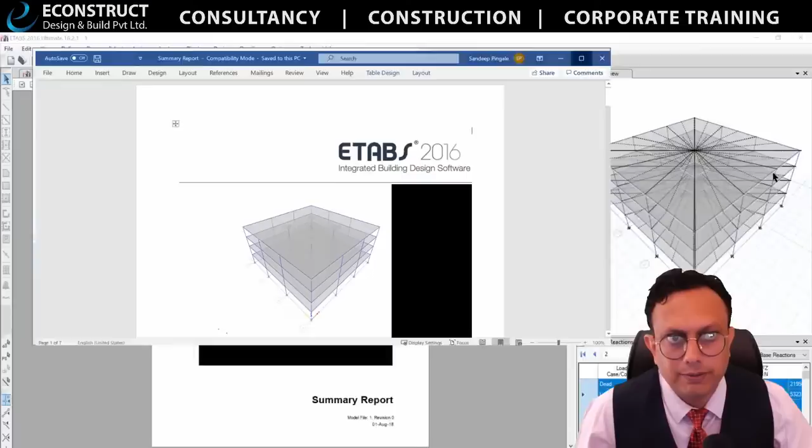Understood? This is one option. Another thing is, let's say it's the summary report I'll create. So it will be creating the report in front of you guys. You can see that this is the report. You press this W, it will be exported to Word. So this kind of report, along with the page number and all, will be exported directly to Word. I'll just open it in Word. I have exported just now. Word will be popped up, and in the Word document, this is a word document which you can edit or change or do something that you want.

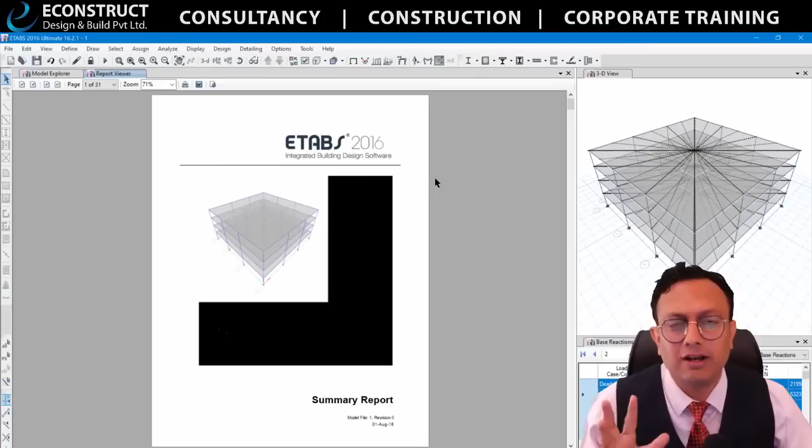Many people think, sir, I want to do my final year engineering project, 6-7 months, almost 1 year the college is giving, how fantastic the project should be. Understood? In our company, we do not give more than 2 weeks. 2 weeks, that's all. And believe me, we sit on their head, playing the drummer, to get it done within that 2 weeks time. That's all. And in the industry, do you really think you will get 6 months or 1 year time like your final year engineering project? Impossible. We generally make the situation in such a way that within 2 days, 48 hours challenge we call it.

So within 48 hours, boom, you should be finishing whatever is required for the industry. Speed. This is how actually, please make sure - you cannot acquire that speed easily, it's impossible. You don't know where is the clutch, driving skills, forget about the car racing game. Impossible. You can do that as part of PUBG or some other games, but in real time, if you really want to work, you need to have mastery in this. This is the real estate industry, real estate, so you need to be having real-time projects.